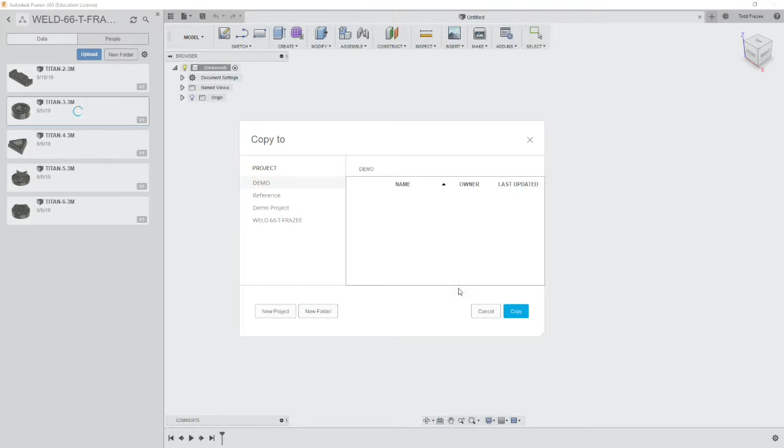We are going to start with copying the model. So you're going to open your data panel and right click on the Titan-3-3M model, select copy, and you're going to put it in your own project. It's important we do this, otherwise you're modifying the model that everybody else in the class is working from.

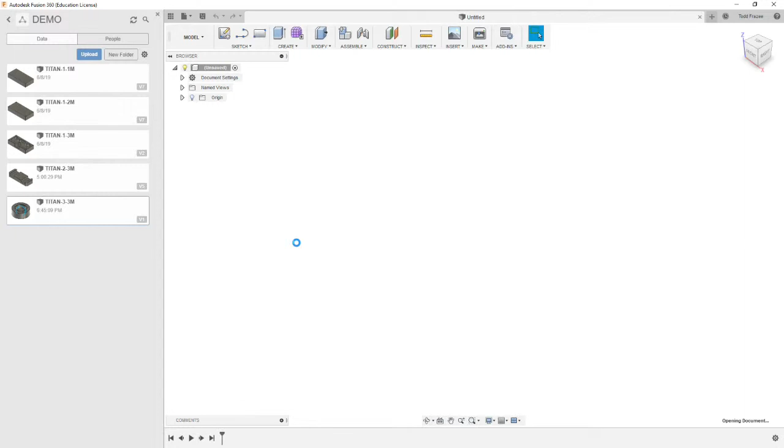Okay, so in my case I have a demo project, and you should see it appear in your project. I'm going to double click that model to open it up, and we're going to switch to manufacture mode to do our CAM programming. We're going to double check we're in inches, and as we have in the past, we're going to create a new setup.

We're making a circular part, but it's going to start as a square part cut from the same bar stock we've been doing all the other projects from. So we're going to select stock, and we're going to set that up initially. So on our stock sides, our diameter that we're working with is, according to the drawing, 1.95, so that leaves us 0.025 on the sides. And our top offset, we'll just leave that at 0.04 at default. That's what we've been doing on everything else.

And our bottom offset is the difference between 0.79 and 1 inch. So our bottom offset would be 0.21, and that's the material we're going to clamp on in our vise. Okay, we're going to go back to setup, and we're going to set our origin again on this same stock point, left back corner. Easy place to register for a first operation, and since it's a first operation, we are going off stock, and we select that.

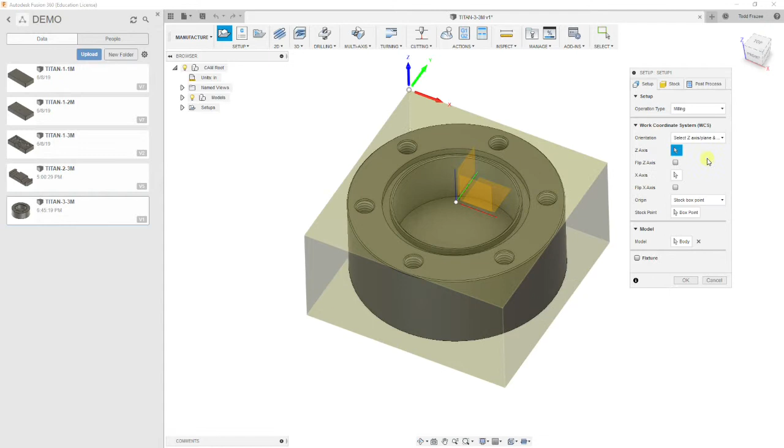Now my axes happen to be in the correct orientation already, but if they're not, you'll have to go to this box here and select the Z-plane, X-axis, and then the point.

Okay, now we're going to go to the post-process tab, and we're going to go with the same convention. We started with 1011, so we'll call this 1021 for this part, and our program comment will be operation 1 with a work coordinate system of 1. Then we'll select OK, and we're going to take a look at an approach on how we're going to make this part.

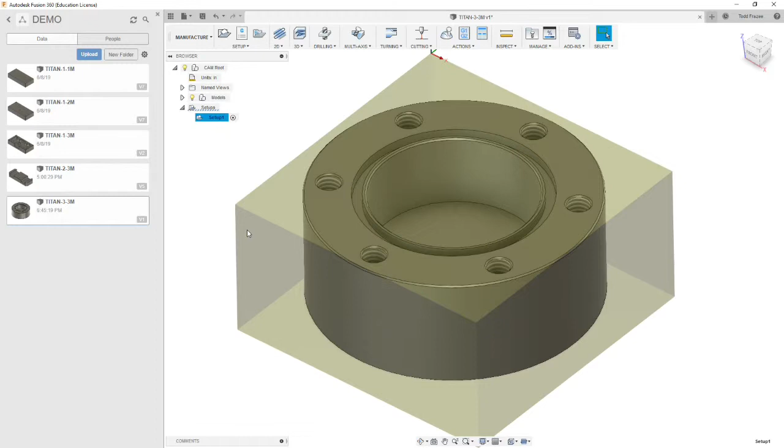So we have a bolt pattern. They're 10-32 threaded holes with a slight lead-in chamfer, and then we have what looks like an O-ring feature, some sort of gland, and then there's a really thin wall here, and then a pocket in the center. So often you want to think about strategy on how you cut something that's a thin wall. Try to leave as much mass on it as possible during the machining, so that you maintain rigidity.

So what we're going to do is, I anticipate a fair amount of friction from our chamfer mill pushing on this edge, and we could bend that wall. So we're going to first machine the pocket, and then we'll chamfer the inside edge while this still has full thickness on it.

And then after that chamfering is done on the inside edge, we'll do the outside edge, and then we'll spot the holes. And then the next operation, we'll come through and do all our drilling, and then we'll come back and do this groove last. So that'll be our approach. Okay, there's more than one way to tackle these projects, but that's the approach we're going to take on this one.

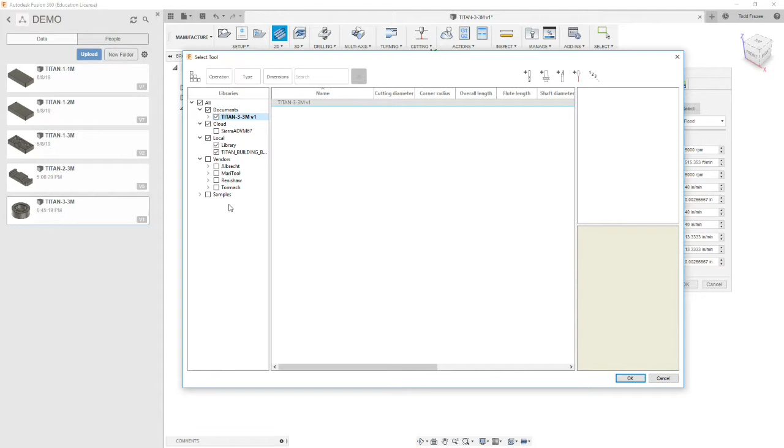All right, so first we're going to do a face mill. We've got to do a 2D face mill operation, and we're going to select our tool, which from the Titan library is going to be your tool 1. That's our 3-inch face mill. And again, we're going to go 4,000 RPM and 25 inches a minute.

This is a small part. Even if we were going to run full tilt, using a 3-inch cutter to cut a 2-inch by 2-inch part puts a lot of torque on that part. So we might go pretty conservative on this one anyway, even if you had a lot of experience.

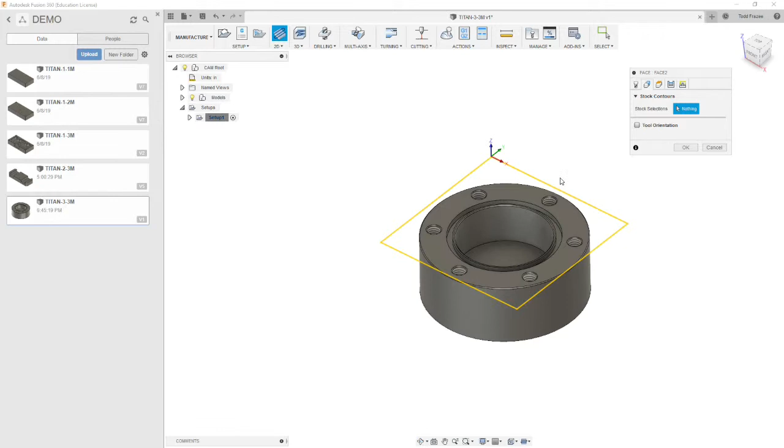Okay, our stock contours, there's nothing to select, it's going to default to our stock boundary we had. And now we're going to go to our heights. Clearance height default, retract height is stock top at default. Feed height is going to be top height, 0.2 higher.

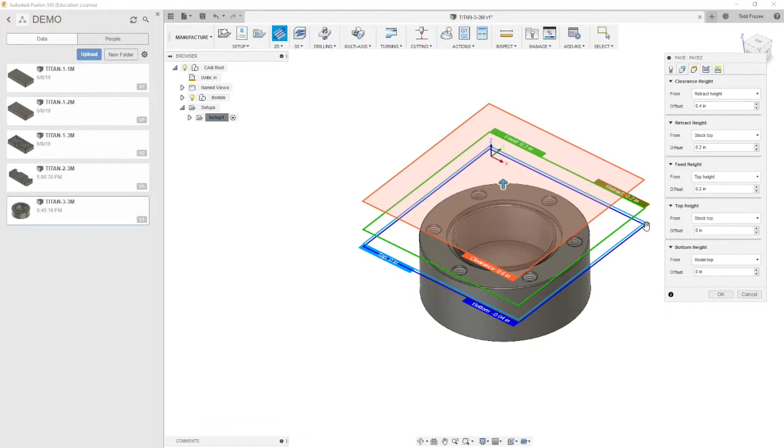Our top height is the stock, because that's where we're gonna start machining. And our bottom height is going to be model top, so we're going to be machining off in between the cyan and blue planes. So we pretty much leave this whole page at default. And we're going to the next page.

4 tenths tolerance, pass direction, 0 is fine. Pass extension, we want a little over half the diameter of the cutter. And then we're not going to deal with stock offset, and we're going to leave the step over alone. We're going to allow the cutter to go both ways, and these other boxes all stay at default. I'm going to move on to the linking tab.

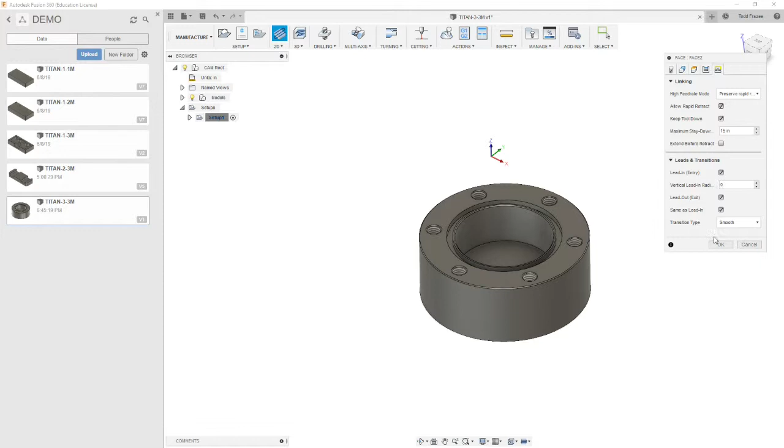On the linking tab, we're going to leave everything in the first box at default. We want a lead-in entry. I don't believe in vertical lead-in radiuses for a face mill, so we're going to set that at 0. And we're going to have a lead in and out the same, and smooth transition. I'll select OK. So we should have this starting off well off the stock and feeding in and feeding back out.

All right, moving on. We're moving a little faster because you have some experience. So now we're going to go in and we're going to mill out this pocket. According to our drawing, that pocket is 1 inch and 1/8 in diameter. For the most part, you want to try to get the largest cutter you can into a feature, unless it's really close to the diameter of the cutter itself.

The end mill tip is not exactly flat, it has a slight taper on it, so it does have to do some horizontal movement in order to produce a flat. And if you come straight down, you get a very slight tapered cone. Go in there with a 1/2 inch. So it's a 2D pocket,

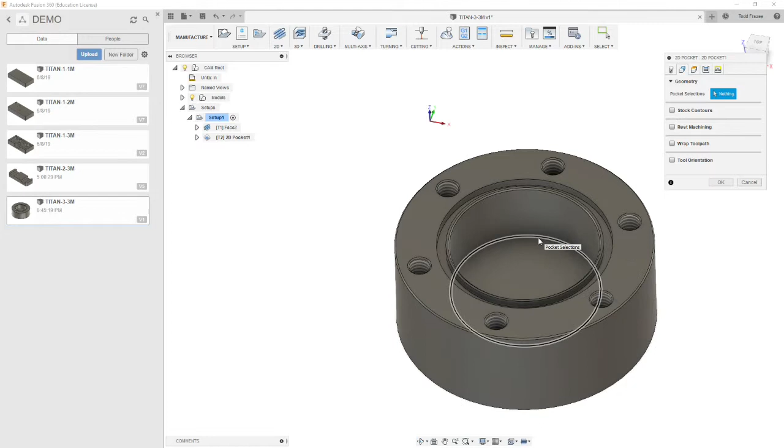and we're going to select tool number 2 from the Titan building blocks, which is our 1/2 inch flat end mill. 4,000 RPM, 25 inches a minute, 25 inches a minute on lead in, 25 inches a minute on lead out. Guess what? 13 on the others. Probably could just leave that number, it's close enough. We're going to go to geometry. We're going to select the bottom of our pocket. Leave the rest at default.

We're going to go to our heights. Now again, we've already milled off the stock on the top, so we really want the retract to be at model top, and the top height at model top. And then I'm going to bump the offset up to 0.3, because we're going to use a helical ramp in on this, so we need a little room for the helix to have a starting point. Okay, our top height is the model top, and the bottom is going to be the geometry we selected, which is there. We're going to move on to the next tab.

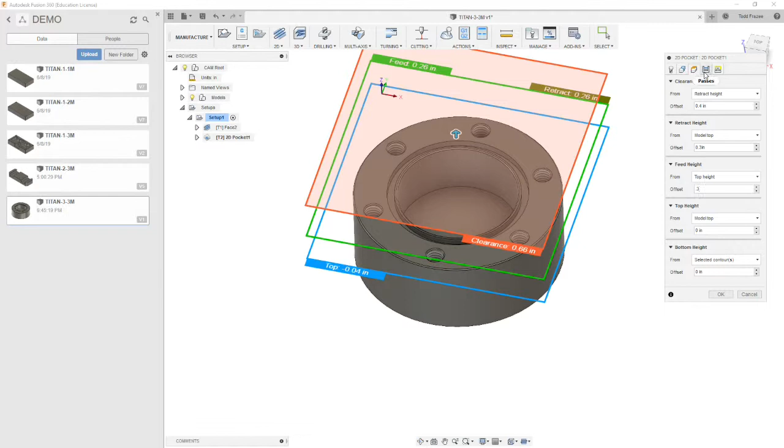For 4 tenths tolerance, we want wear compensation, and compensation radius can stay the same. We're going to do finish passes. We're going to do one finish pass. We're going to leave 20 thousandths for the finish cut to remove. We're going to lead in on all finish cuts. 25 inches a minute. We're not going to repeat any of the finish passes, and most of these can be set at default. Our maximum step over, we're going to put 0.25 just so that we start out with a couple rough steps.

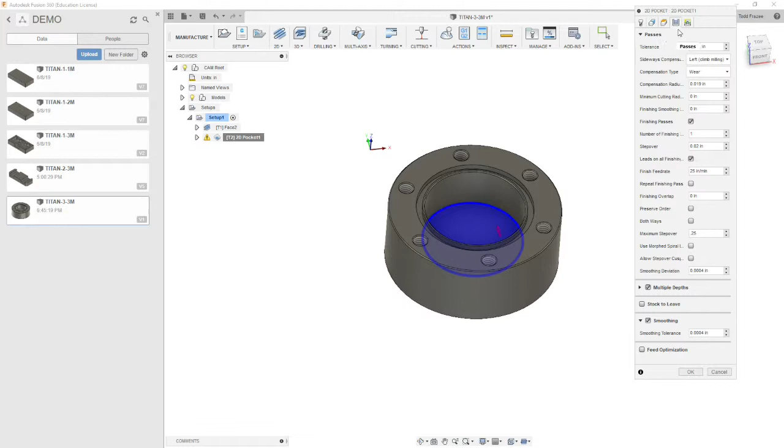And then we're moving on down to smoothing deviation, and then multiple depths. We are going to do one finish step at 10 thousandths. We're going to finish at final depth only. We are going to rough that final depth, and we're going to use even step downs. So I'm going to hide this for a moment. We're going to skip stock to leave, and now we're going to move over to the linking.

We're going to leave all these boxes at the top on default. We got our horizontal lead-in radius, 0.05, that's fine. 90 degree angle. Linear lead-in distance is 5 thousandths. Vertical lead-in radius, we're going to set that at 0. We're going to leave these two at default selected. We're going to have a ramp, 2 degrees. Maximum ramp step of 0.2.

I'm going to say 0.5. Our ramp clearance of 0.1. Radial ramp clearance is going to be 0.1. Helical ramp diameter, we're going to make that smaller. We're going to make that 0.125, which also makes our minimum ramp diameter the same. There's not a lot of room for this cutter to move in there. Now I'll select OK.

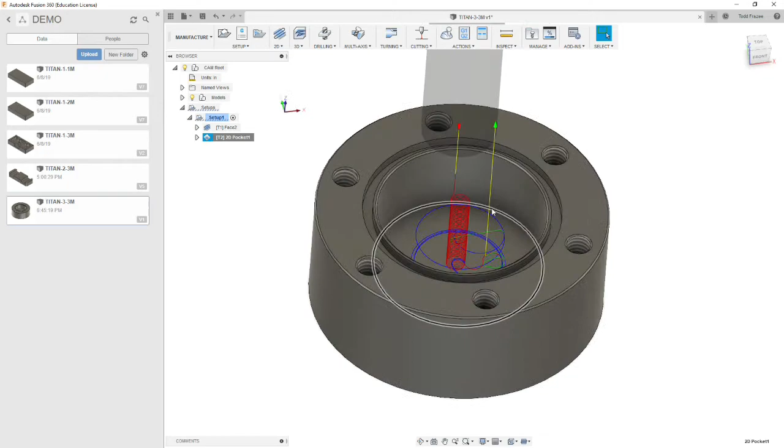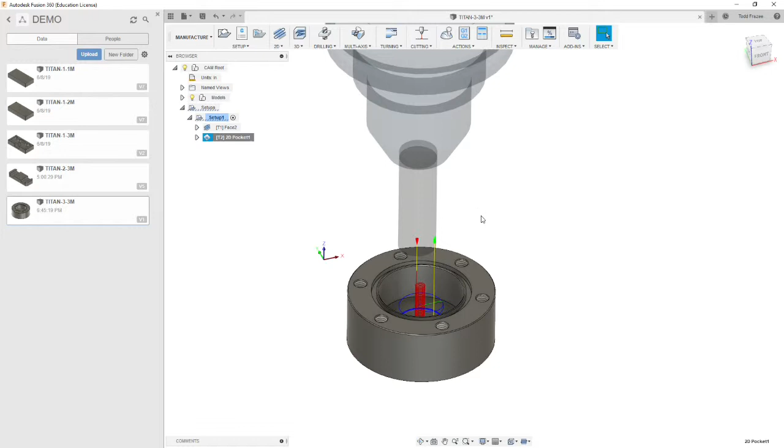Alright, so we have a helical move in the center, and then we spiral out. We do a couple rough cuts, and then we do a couple finish cuts. Okay, so we have our pocket cleared, and now we're going to contour the outside with that same cutter.

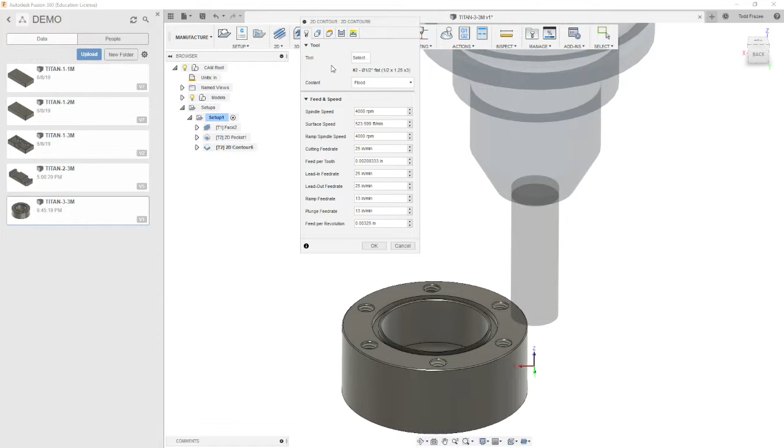So we're going to go to 2D contour, and our feeds and speeds should come right back in from the last routine we just did with that end mill. Now we're going to go to the geometry tab, and the geometry we are going to select will be the bottom of the part edge. Now we're going to go to heights, and because we've milled the top down, our top height is going to be model top, and same thing with our stock, the model top.

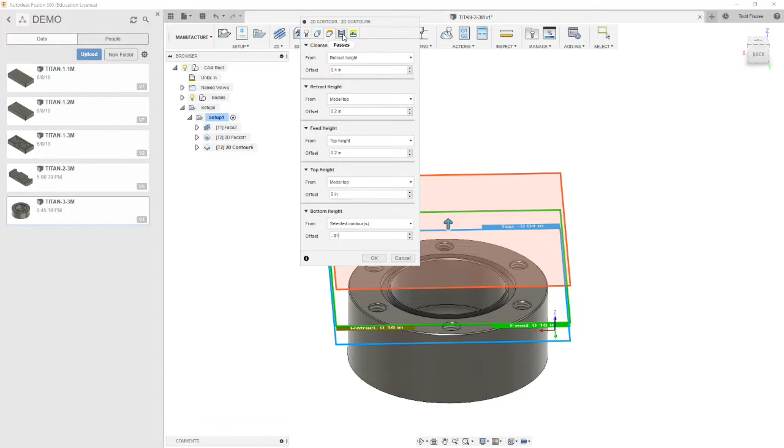We're going to go to our selected contour, but we're going to go -0.01 so that we cut a little bit more material, so we're ensuring that we don't have any flash when we flip the part over to be machined. Okay, going on, the next tab is passes, 4,000. I'm going to put on wear cutter compensation,

and we're going to go to roughing passes, and that'll bring up our finishing step over, and we're going to leave 0.01 as our finishing step over. 10 thousandths to be removed by the finishing cut. Okay, we're going to move on down to maximum step over is going to be 0.4. Smoothing deviation, we can leave that at 4 thousandths. Actually, we're going to bump that up to 4/10. We're going to have one step over.

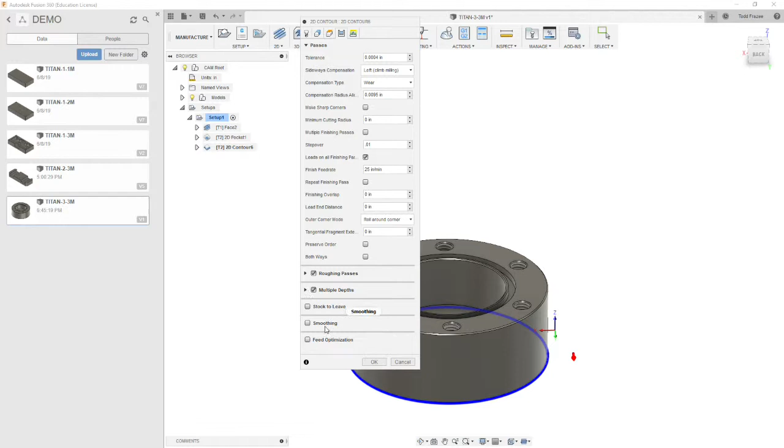Then we're going to go to multiple passes. We're going to do a maximum step of 0.5, finishing step down 1, and actually we're not going to do any finishing step downs, and our approach angle is a long wall. We're going to finish at final depth, and we're going to rough the final, and we're going to use even step overs. Minimize that. The rest of these parameters stay at default. And then we're going to select our smoothing, 4/10.

Now we're moving on to the linking tab. We're going to leave all these at default. We're going to have a lead in of 50 thousandths, that's fine. Sweep angle of 90. We're going to do a linear lead in of 0.1. And we're going to have vertical radius of 0. We're going to have a lead in and out that is both at the same length. And ramp we're just going to leave alone.

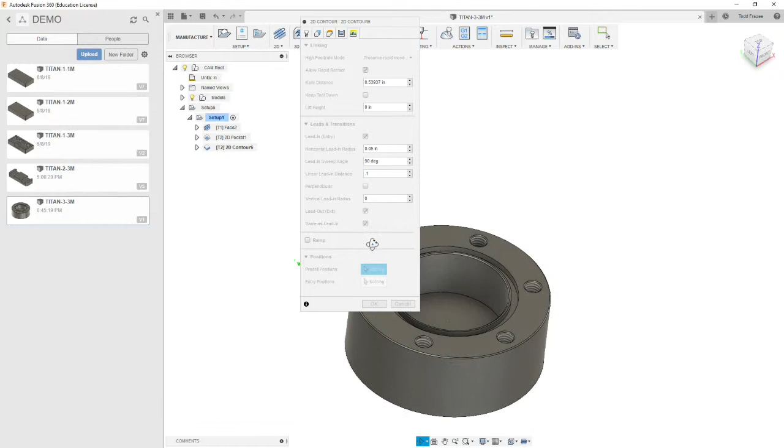And we're going to look at entry locations because we're cutting this out of rectangular stock. So over here on the corners we have a lot more material. So we most likely want to enter on one of these sides. And we're going to select the point that is, if we were to go to the top view, and then we were to roll the view vertically, we want it kind of in line with this hole here.

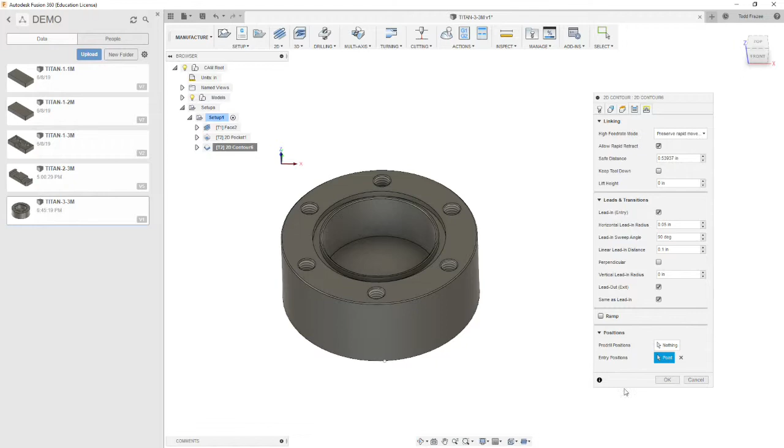So we'll do our lead in, our entry position there. We only have 25 thousandths of stock here and 25 thousandths of stock here. On the right and left it's saw cut, so we might have more. This ensures that our lead in and lead out is in a good place where there's not excess material. We're going to hit OK, and that puts our arc in and arc out right there up in the front.

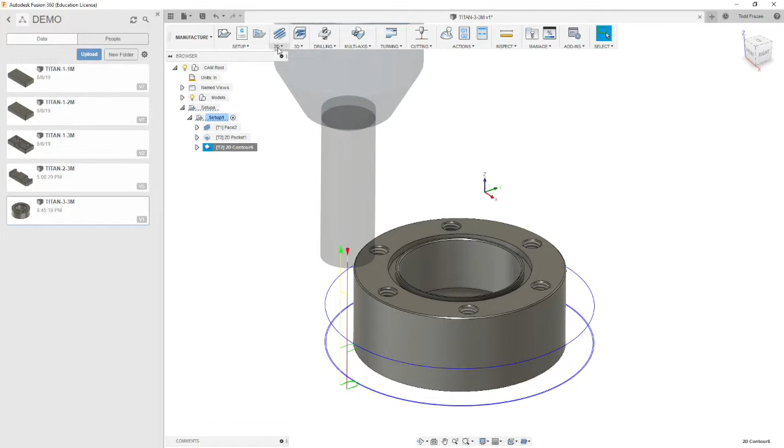Okay, so moving on to our chamfer. We want to chamfer this inside edge, especially before this circular groove is put in. So we're going to go to 2D chamfer, and we're going to select our 1/4 inch chamfer tool from the Titan library, which is tool 15. We're going to go 4,000 RPM, 20 inches a minute's fine there, 20 inches a minute here, 20 inches a minute here, 10 on our plunge rates.

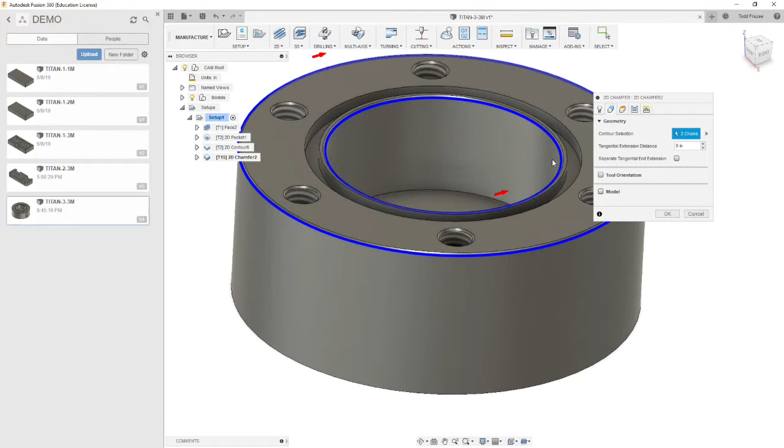We're going to geometry, and we're going to select the bottom of that chamfer, and we're going to select the bottom of the exterior chamfer. We want to make sure that our arrows are on the correct side of the part. They look like they are. If not, you can toggle them by clicking on them.

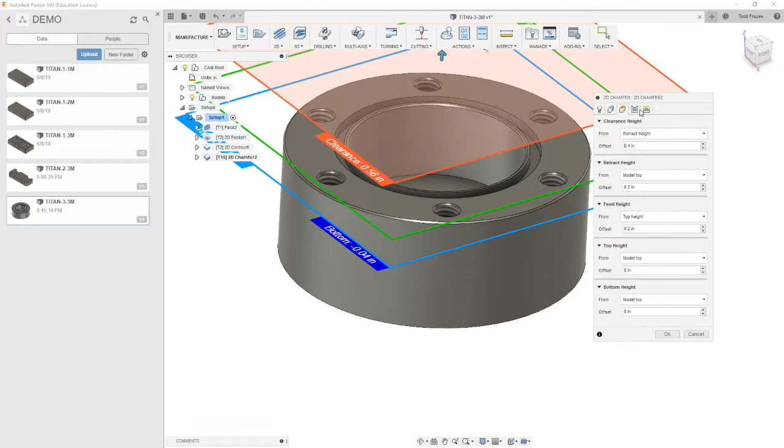We're going to go to heights. Okay, we're going to go from model top and model top because our stock has been machined down. Our bottom height is also going to be from model top. This allows us to project this profile to this height so it can calculate the chamfer height. We're going to go to the passes. Okay, 4/10 tolerance. We're going to do wear compensation. We're not going to have any finishing overlap.

Our chamfer width is 0.01 and our chamfer offset of 0.04 at default's fine, and we're going to put 0 on our chamfer clearance. We don't need help with that. We're going to select the smoothing box, which is 4/10. Then we're going to go to the linking tab. We're going to leave these all at default.

We're going to have a lead in with a horizontal radius of 0.1, and then a lead in sweep angle of 90 is fine. A linear lead in distance is going to also be 0.1, and I guess it's going to be perpendicular, and we're not going to have a vertical lead-in radius, and we'll leave the entry positions alone and select OK. Okay, so we have our arc in, arc out for both of our chamfer mill routines.

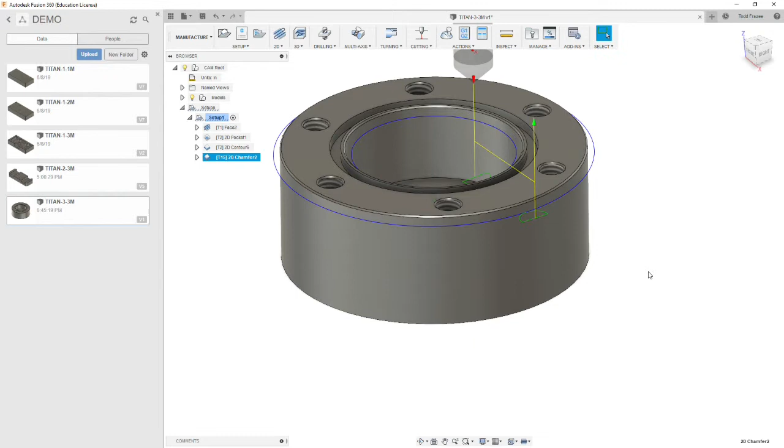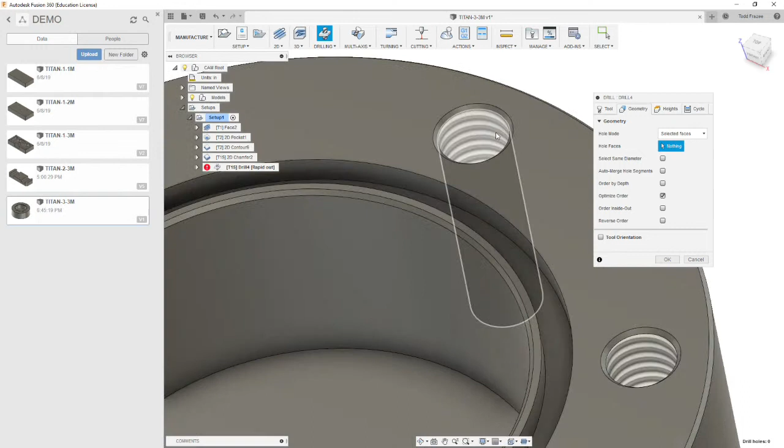Now, so we're efficient with our tool change, we're going to move on to drilling with that same tool. So we're going to select drill. We're still going to use that same drill bit, and our plunge feed rate and retract rate should be about 10 inches a minute with that cutter. We're going to go to geometry, and we're going to select faces. Why don't we select the 12 o'clock face, which is this chamfer here. Then we're going to select the button that says same diameter. And provided optimize order is selected, it'll go in the shortest distance between the holes.

Now we're going to go on to heights. Our retract height is going to be model top. Our top height is going to be the top of the hole we selected. The bottom, we're going to actually set it at the hole top as well. And we have a 0.180 diameter chamfer right now there, so what we're going to put in is a negative offset of half of that, which is negative 0.09.

And then we're going to go to cycles. We're going to use a counterboring cycle that allows us to put a dwell in, and that dwell is going to be 1 second. So it's going to come in, go in, dwell for a second, pull out, just in one peck. And this will ensure that the spindle rights itself, and the finish on the edge should be good. Let's hit OK.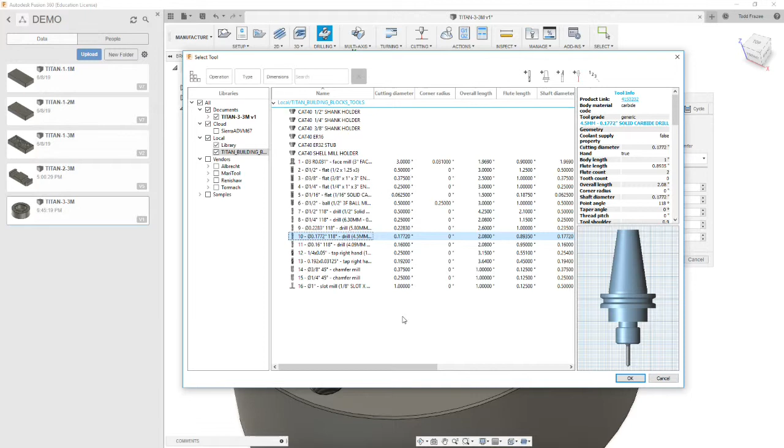Alright, moving on. Next drilling cycle. Now we need to go in with the tap drill size. So we're going to go drill. We're going to select the tap drill that corresponds with a 10-32 tap, and that is the 0.177 drill. Select that and hit OK. So we're going to go 4,000 RPM, 16 inches a minute in, 16 inches a minute out. We're going to go to geometry. We're going to select our 12 o'clock position again. We're going to select same diameter, leaving the rest at default.

We're going to go to heights. Again, model top. We actually don't want to do hole top on this because we want to include the chamfer. So we're going to go to model top, and the bottom is going to be the bottom of the modeled hole, but we're going to put the drill tip through that bottom to make sure that it goes full depth and leaves enough room for our tap.

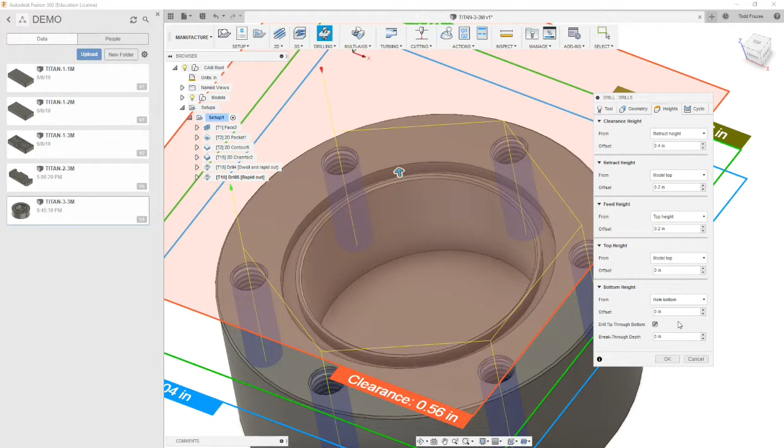We're going to select cycle, and we're going to use a deep drilling cycle for this. Our peck depth is going to be 0.04, and our minimum peck depth will also be 0.04. We don't need the pecking depth reduction. That would be for if you're going to super deep holes. Okay, we're not going to dwell, so we're going to hit OK. So we've now done our tap drills. Now we need to come in and do our tapping cycle.

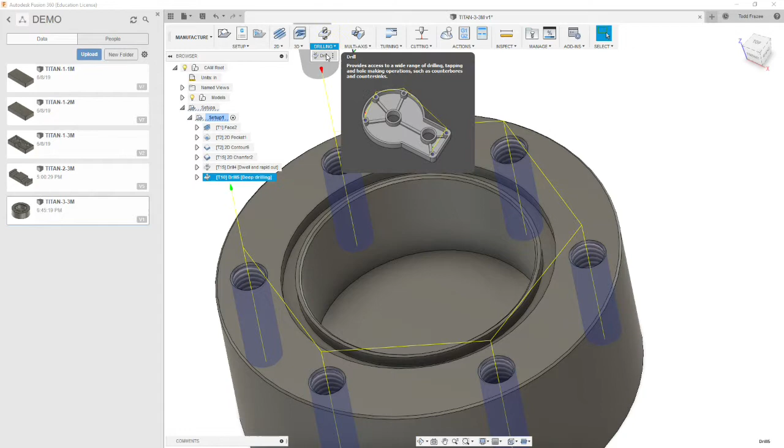Select drill. We're going to select the 10-32 tap, which is this one here, tool 13. The description you see here isn't real clear, but if you do select on it, you can see over on the right, this does say it's a 10-32 UNC tap. We're going to select OK. And we're going to bump the RPM up to 700, but leave the surface speed alone. It's calculating for the number of threads per inch that's required. We're going to go to geometry. We're going to select the same hole we've been selecting, and then select all of the same diameter.

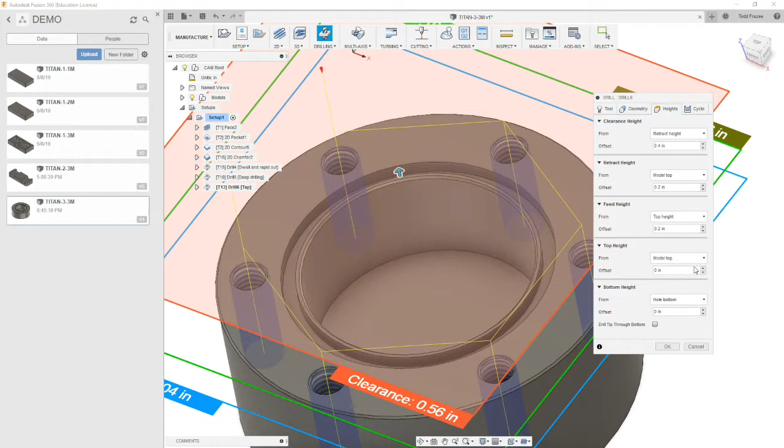Okay, moving on, we go to heights. We're going to go model top. We are going to go from model top here as well. And then the bottom is going to be from model top, and we need to calculate how deep we're going to go. So our print says that we're going to go 0.375, but we know the first 3 lead teeth on a tap don't form a full thread.

So we're going to calculate what we need to do here. Select calculator. We know it's a 10-32 tap. That means there's 32 threads in 1 inch. So if you take 1 inch, divide it by 32, that's how much distance each thread needs. If we multiply that by 3, that gives us 3 thread pitches. It's almost 0.1, so I'm going to round that up to 0.1.

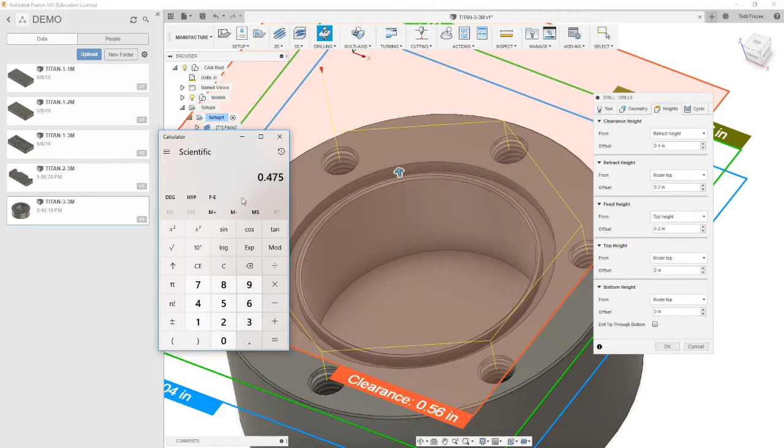So our finished thread depth is supposed to be 0.375 plus 0.1, or 100 thousandths, which gives us a resultant of 0.475, or 475 thousandths. So we're going to put that number in here as a negative 475 thousandths as our distance. It looks like I put 475 inches. Let's make that 475 thousandths. Okay.

All right. So now we go on to cycle. We're going to do a right hand tapping cycle, and we don't need it to dwell. Okay. And there's our tapping cycle.

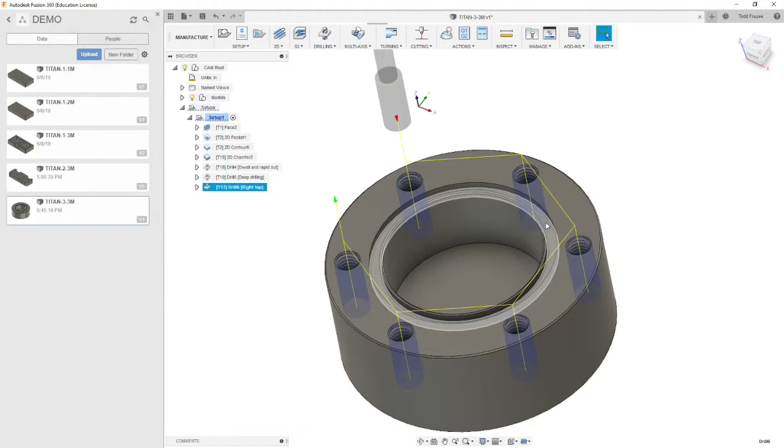Moving on, the last routine we have is to make this groove here, and we're going to use a 2D Contour with a very small cutter, and there's not enough actual room for it to ramp in within there. The end mill itself is only 0.07 smaller in diameter than the finished size of the slot. So we're going to do a rough and finish pass on this contour, and then we'll come back and just do a finish pass on this contour.

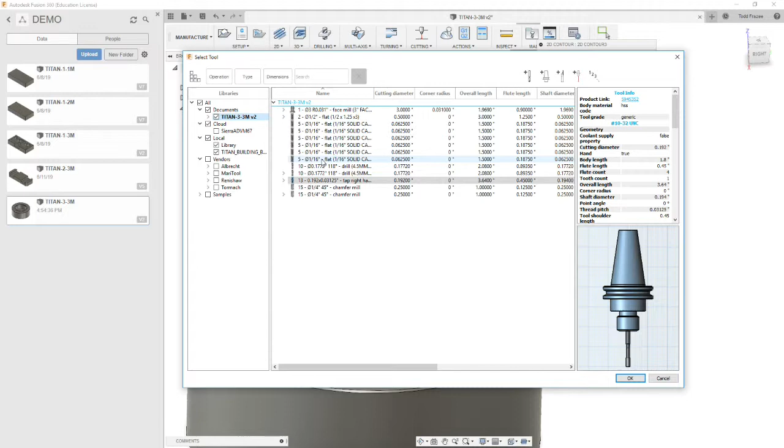Okay, so we're going to go to 2D Contour, and we're going to select tool number 5, which is our 1/16th flat end mill. We're going to bump the RPM up a little bit on this one, 5,000, because it's a small cutter. And we're going to do a cutting feed rate of 12 with a lead-in feed rate of 12, and 6 and 6 for our ramp and plunge rate.

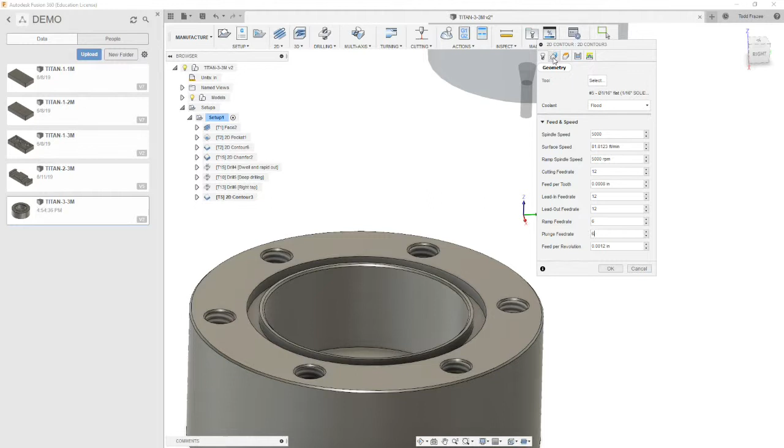The small cutters like this don't do too well in aluminum. They kind of want to gall, which is a term for when material re-welds or smashes into itself. It's malleable, and it often sticks to the small cutters. We're going to go to geometry, and we're going to leave everything.

We're going to select this outside chain, and how we're going to approach this is it's going to do in effect 2 finish passes on this side, and that first cut will remove most of the material, and then we'll do a single finish pass on the inside, which will bring it to size. So we're going to select this chain first. Going to make sure our arrow is on the correct side of the blue line, which it appears to be.

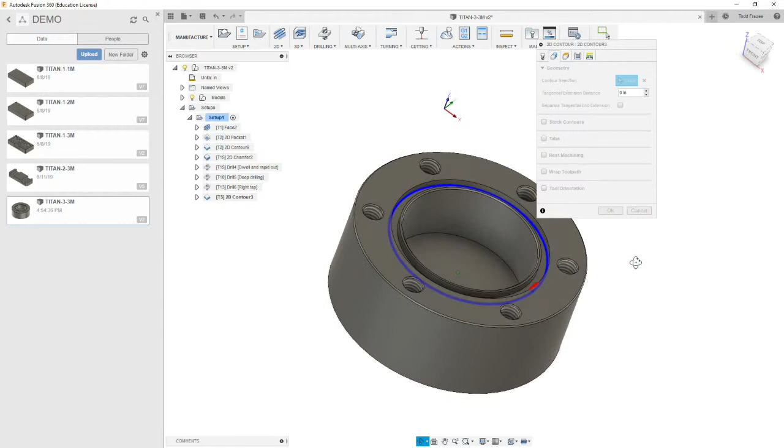And then we're going to go to the heights tab. As you guessed, we're going to do model top and model top, and selected contours is our bottom. And we're going to go to the passes window. We're going to go climb cut, and in this case there isn't enough room to do a lead-in, and compensation requires a lead-in for the machine to do the compensation move.

So we're going to leave that at in computer, and for this one routine it's not going to output a G41, and that G41 is our cutter comp, so we won't be able to adjust the diameter of this cutter at the machine. We're going to move on. All these radiuses we're going to leave alone. We're going to do multiple finish passes, and we're going to do 2 of them. And the step over is going to be 0.005.

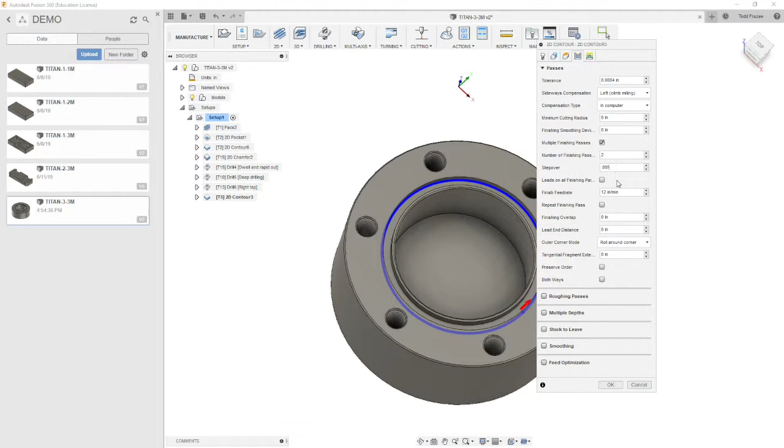It's less than 7 thousandths or so we have in between it and the next wall. We're not going to do any lead-ins. We're not going to repeat the finish pass. All these we're going to leave at default. We're not going to do any roughing passes. We are going to do multiple depths, and we're going to set this at 20 thousandths. And we're going to have one finishing step down at the bottom, and it's going to be 5 thousandths.

We're going to leave our wall taper alone. Approach mode, we're going to change this because we're not leading in from the side; our approach is going to be vertical. So we're going to plunge straight down with this cutter. And that's one reason I slowed the feed rates down quite a bit.

We're not going to, in this case, finish at final depth. We're going to do a finish cut at every pass. And we're going to rough the final, and we're going to use even step downs. Okay, so now we're going to select on smoothing.

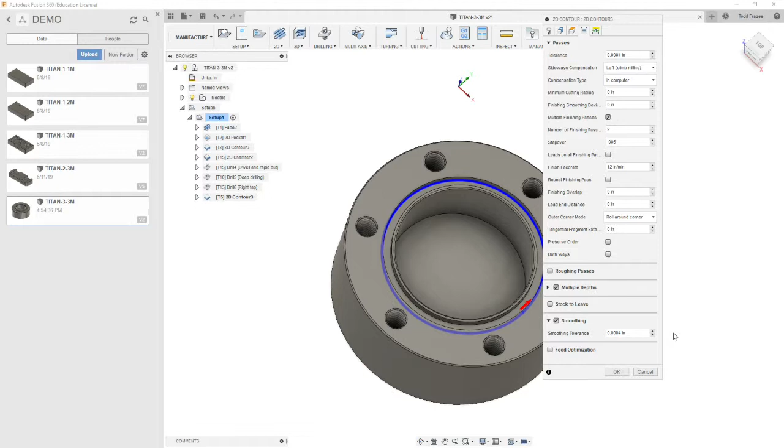And then we're moving on to the next tab, under our linking tab. We're going to leave all these at default. We're going to deselect a lead-in entry and exit out. And we're not going to use a ramp either because we're going to plunge straight down. And then we'll hit OK.

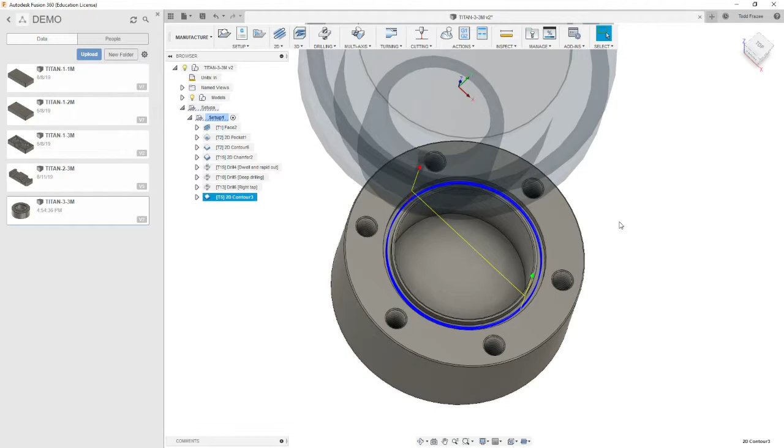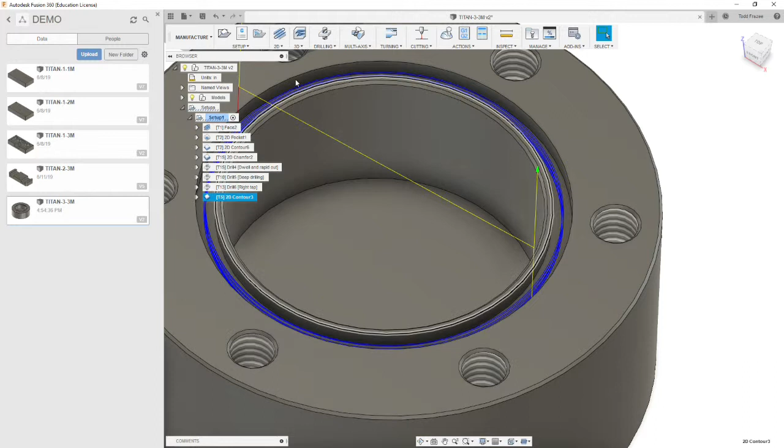Alright, so we have our 2 finishing passes, which in effect is going to be a roughing pass for us. It'll do the first one and then move over to the second one. And now we have to do one more 2D contour on this edge, and that'll bring it to finish size. So we'll go 2D contour, and we're going to use the same tool, same parameters, so we can leave that alone.

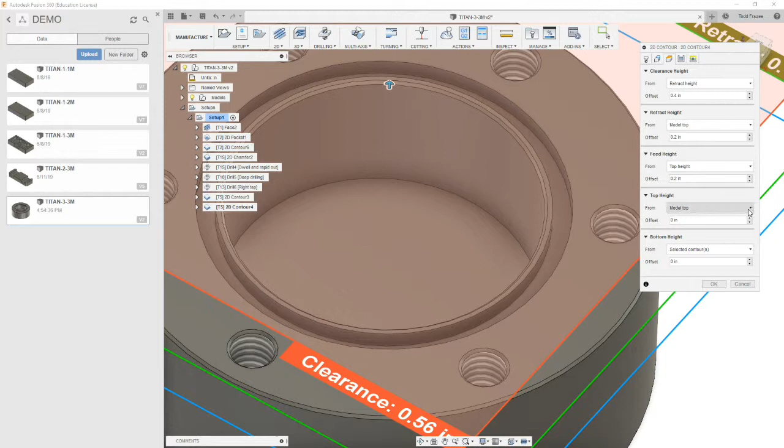We're going to go to the geometry tab. This time we're going to select the inside curve, and we're going to leave that arrow where it is. And then we're going to go to our heights, changing both those to model top because our stock's been machined off the top. And then we're going to go to our passes. We're going to leave all this the same because we've already removed the bulk of the material.

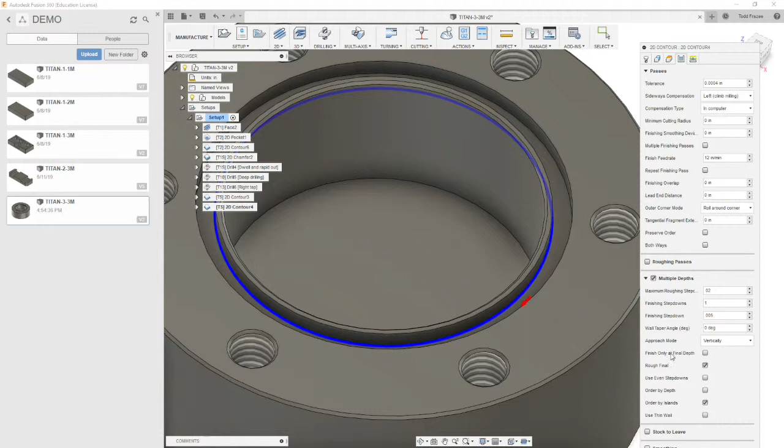We are going to do multiple depths, and we're going to set our parameters for this as the same as last time. So 20 thousandths steps. We're going to have one finishing step down at the bottom, and that'll be 5 thousandths. And no wall taper, and we're going to come in vertically, and we're going to finish it at every depth. We're going to rough the final depth, and we'll use even step downs. And we'll minimize this now and select our smoothing on.

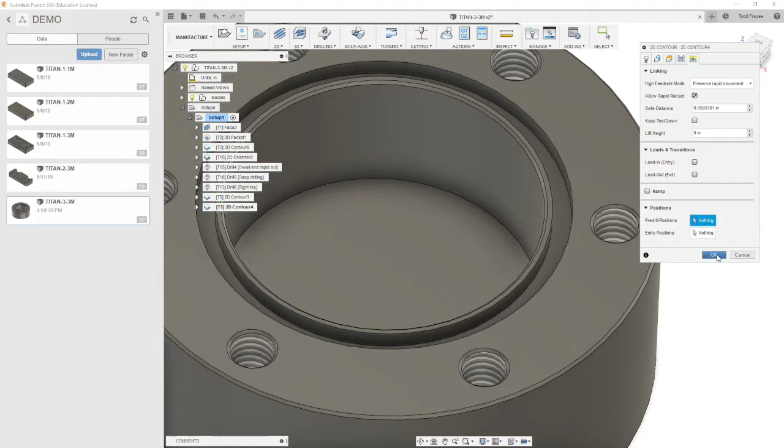Moving on to the next tab, we're going to leave all these at default, and we're going to remove the lead-ins, and we're not going to have a ramp. We'll select OK, and that's our next routine. It's really just cleaning up probably about 2 to 3 thousandths off of this wall. Well, our next operation is going to do the opposite side of this part.

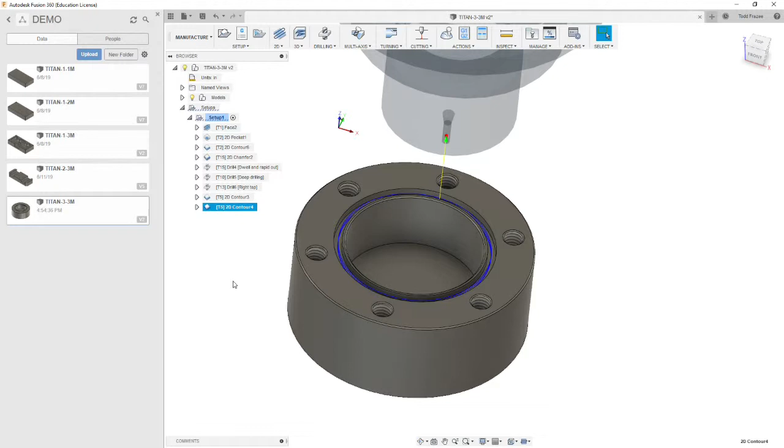Now we're going to be holding this with a soft jaw, but if you remember, we're going to have a square piece of material about 1/4 inch thick still attached to the other side. We're going to set up our origin differently on this one, and it's going to also be a little bit different thinking on how we approach this. So let's create our new setup, and we're going to rotate the part in the orientation that we're actually going to be making it.

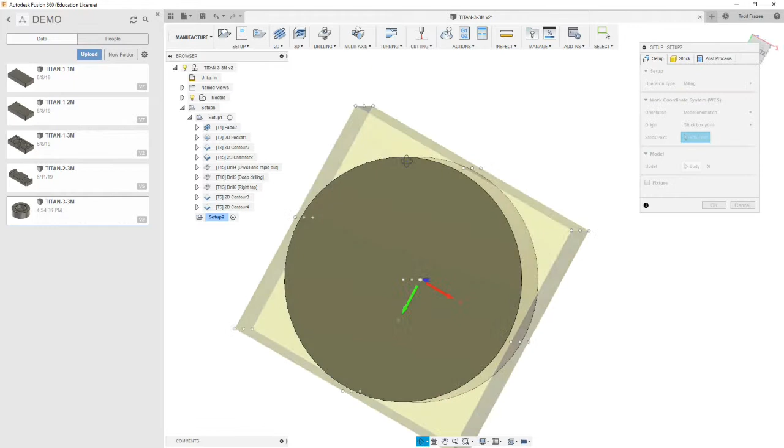Okay, and our stock size right now, we've machined the material off the top, and we still have our side offset of 0.025 for the rectangle, and our top offset should be 0.21, which brings us 40 thousandths less than the inch we started with. And our bottom offset's 0, it's sitting right on its machine face.

And then we're going to go to the setup tab, and we're going to select the Z-plane and X-axis. So our Z-plane is going to be here, and our X-axis is already oriented the way it should be. If you're having trouble with it, you may need to hit flip axis. Okay, but our origin, we're going to go to a model box point, and we're going to actually select this one in the center bottom.

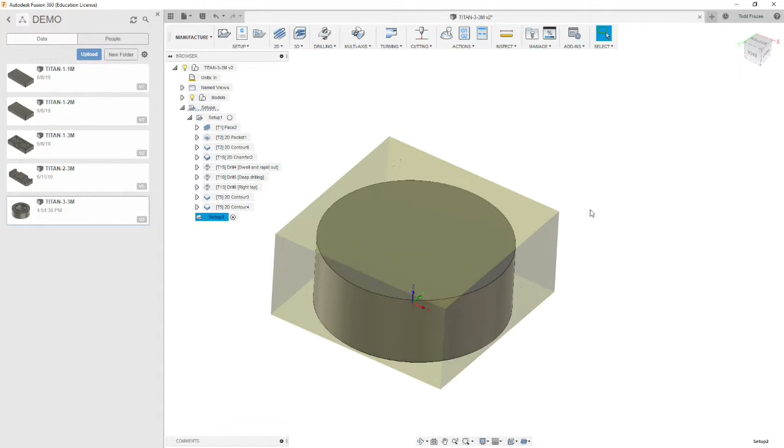Alright, so the material we need to remove is in between the top of here and the top of there. We could use a face mill, but this is a pretty small part to have a face mill rip across, and the larger the diameter of the cutter, the more torque goes on the part. And because we're really holding onto a circular profile, we can rip this part out by twisting it.

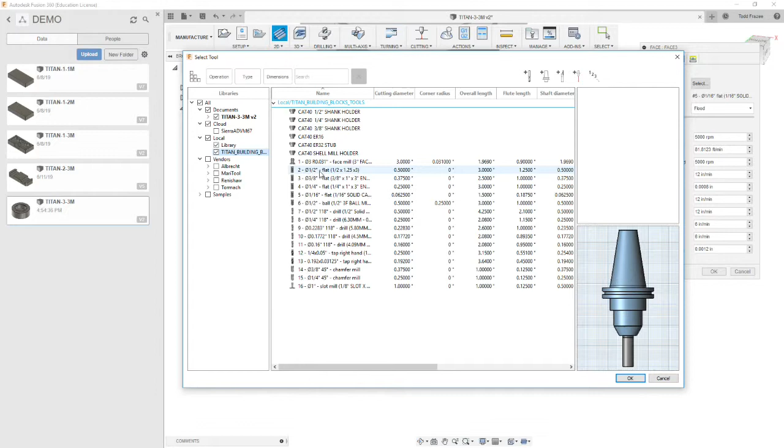So we're going to do a 2D facing operation, but we're going to select tool number 2 for that one. So we're going to use tool 2 from the Titan library, which is a 1/2 inch diameter end mill. And scale wise, you can see the size difference between it and the part. 4,000 RPM is fine, and we're going to do our 25 inches a minute we've been doing.

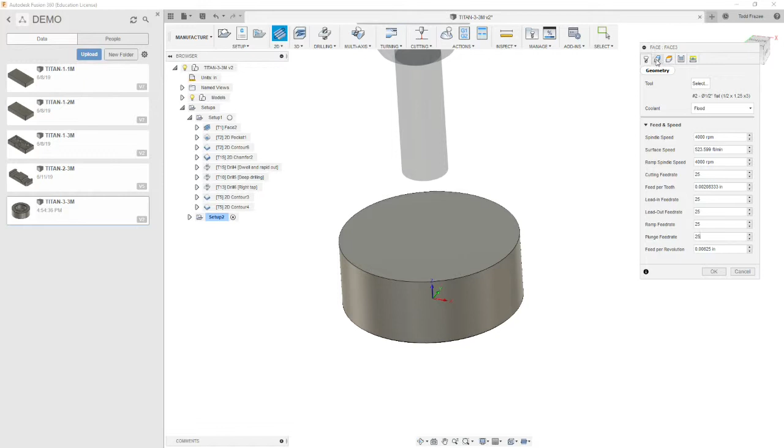And 12 or 13 is fine for the plunge rates. Actually, we're doing a face mill, so this would be 25. We're going to be approaching from off the work. On our geometry, we've got our stock box boundary, which is fine.

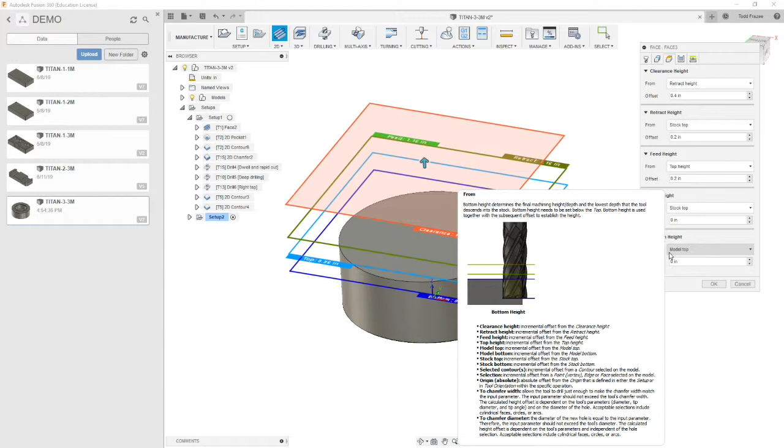Now we're going to move on to heights, and stock top's fine, and we are going to go to model top for our finished height. So we'll be removing the material between the cyan and the blue planes. Now we're going to go on to passes.

We could change the pass direction. In fact, let's do that. We're going to go 90. And that should put us in the same axis as the fixed jaw of the vise, pushing the force against it.

Okay, our pass extension is going to be a little bit more than half the diameter of the cutter, half the radius of the cutter, so it's a 1/2 inch end mill. We'll put 0.3 as our pass extension, and we'll leave stock offset alone.

And our step over, 0.4 would be optimum, so that's what we're going to put in. 0.4 is 80% engagement. We're going to go both ways, so it's going to crisscross back and forth. And we are going to do multiple depths because we're taking quite a bit off.

We could take this off all in one pass, but if we want to ensure that we're not putting too much up force on our part, because we're not holding on to it very much, we're going to reduce that. So let's do it in 0.125 steps, so 1/8 of an inch. And that's also going to go from both sides.

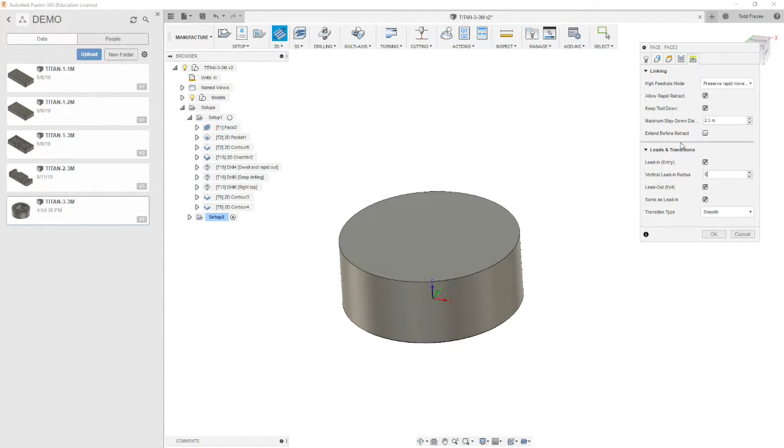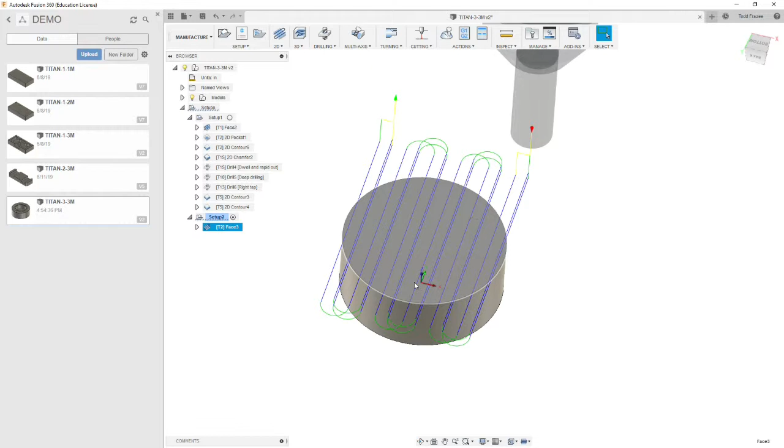We don't need a vertical lead in, so we're going to leave that at 0. And the lead in and lead out will be the same. And let's select OK. So we've generated these passes that should mill down all of the remaining material on this top, and we're going to start, it looks like, back here and work our way back and forth.

No, I guess we're starting here and it's climb cutting. Yeah, so it'll take a couple passes to remove that. All right, so let's simulate this. I don't think we've simulated it. So we'll go back up to setup 1 and simulate that one first.

And we'll want to flip the orientation to where we're looking at the part in the same orientation. We're highlighting the setup. We're going to simulate. We're going to make sure stock is selected. And then we're going to hit play.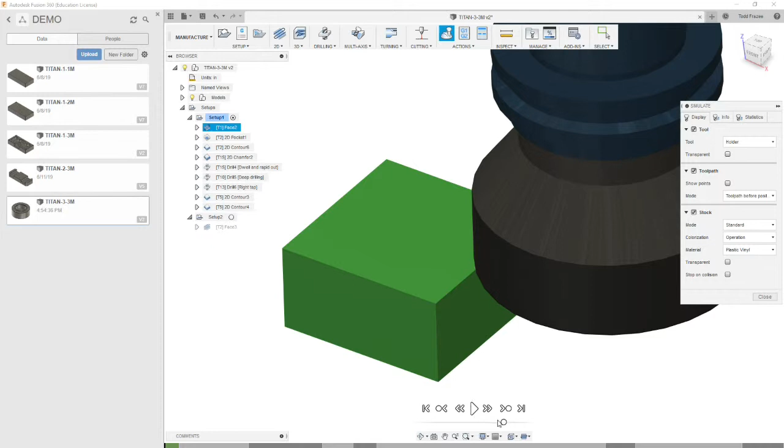We have our face mill, and we have our spiraling down. To one peck, we go spiraling down to the next depth. A little bit of a spiral. It's roughing the bottom, and then did a finish cut on the inside. This cut's going around the outside. Did a couple roughing cuts. Now it's doing its finish cut.

Our chamfer mill comes in and does the ID and the OD. That would be inside diameter and outside diameter. Now it's going to come in and spot the holes. And then our peck drill comes in. I'm going to skip because I don't want to watch that. And then we have our tap coming in.

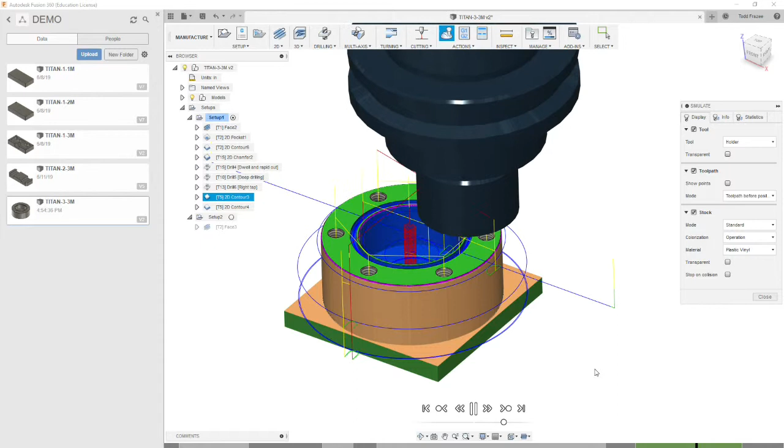And we have our 16th end mill doing its initial passes. And it's going to come in. And it's coming over and doing the inside, because you see it change directions because we're climb cutting. Okay.

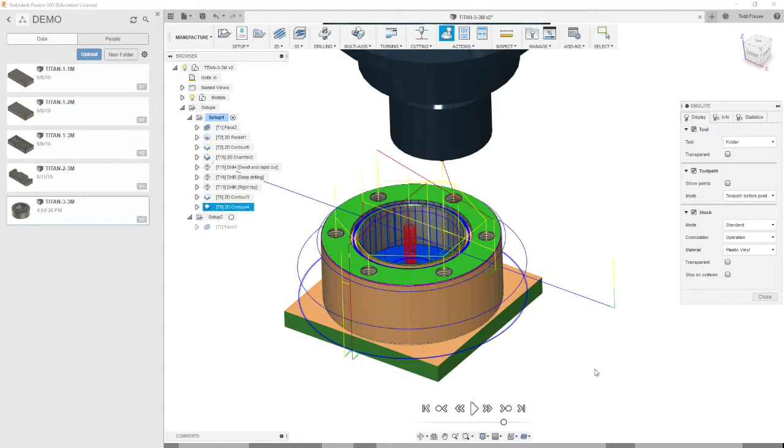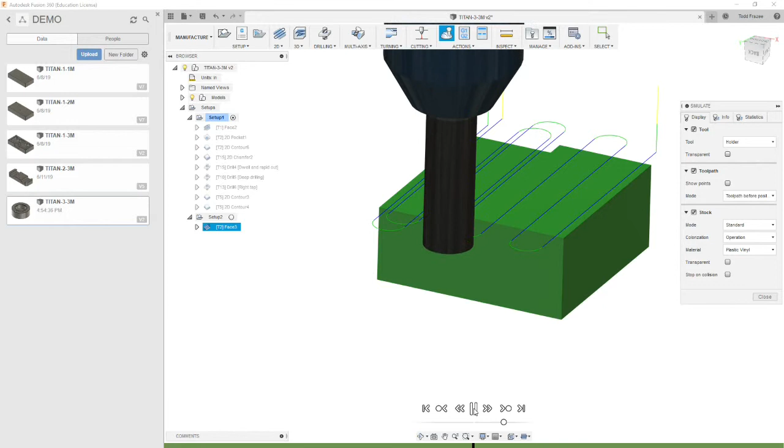Okay, so we're going to close the simulation on that side, and then we're going to go to setup 2, and we'll look at that one. So it should be taking off a little less than an eighth. And now we should be skimming it to do our finish cut. Okay.

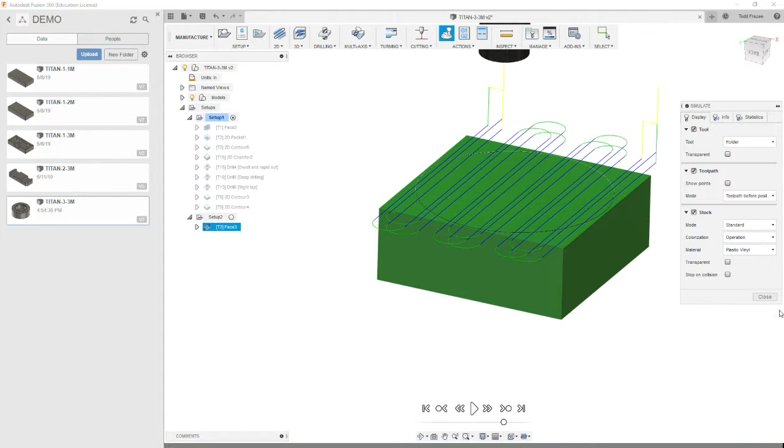We're done with this part, and when you're finished with it, once approved, you can run. Again, you're going to need to upload 2 setup sheets, one for setup 1 and setup 2.